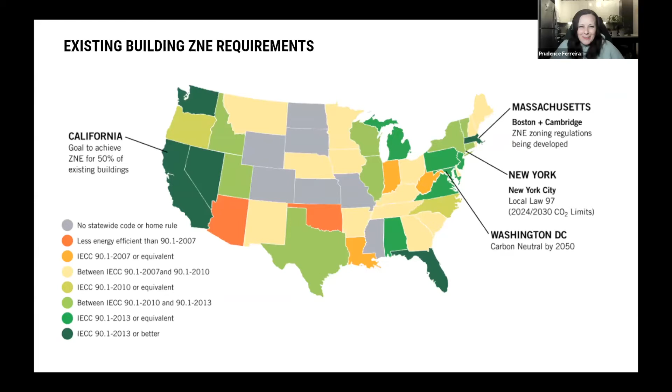And we also all know that every new building that's not net zero ready, at least, is soon going to be a huge liability for our owners and society as a whole. And we just don't have the time or resources to retrofit buildings we design today in 20 or 30 years. And then also the retrofit standards are coming. We have leaders there. And we've heard from our friends at NYSERDA that we need 9,406 retrofits per day or 783 retrofits per hour to meet those 2050 zero emissions goals in the US alone.

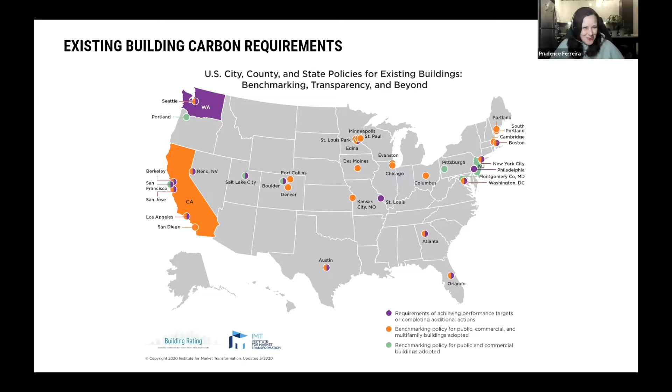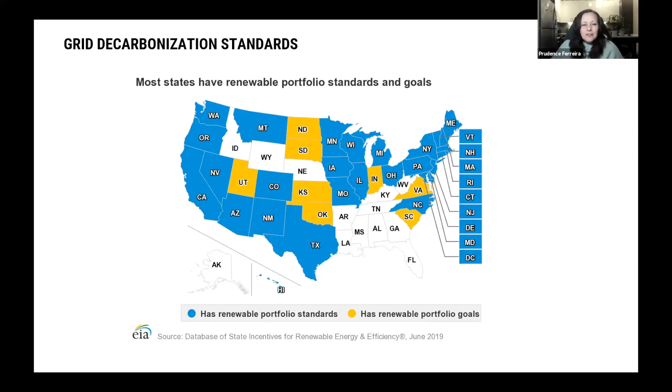And carbon limits are being put in place for existing buildings across the US, not just in New York, although they are leading the way. Massachusetts is close behind, California is leading the way, Washington. And there's also policy around cleaning up the electric grid. As of September 2019, Maine, New York, California, Hawaii, Nevada, New Mexico, Washington, and DC have requirements for 100% clean electricity by 2050. But we need all three legs of the stool to ground and support us in achieving climate action and ultimately climate justice.

And while there are many jurisdictions at all levels leading the way, there are more that don't yet have a plan. And we need all of our communities to have access to a reference standard that gets the balance right and clearly lays out the most effective path to reduce operational carbon emissions for the life cycle of a building. And that starts with envelope efficiency first.

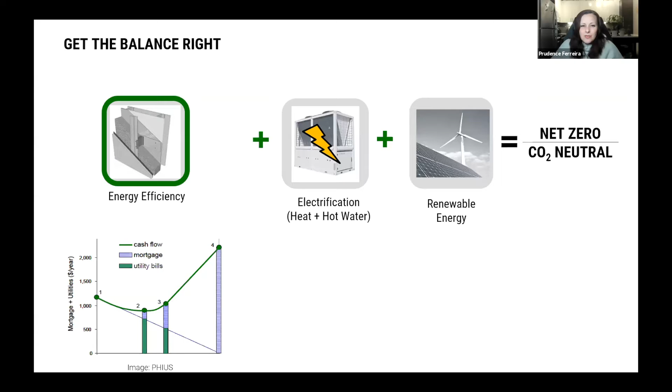So optimizing investment in envelope to the point of diminishing returns with backstops for comfort, resilience, and durability leads to the greatest emission reductions at the lowest construction cost premium due to reduced mechanical and renewable resource costs. We know this. This is basic passive house tunneling through cost barrier stuff with the highest life cycle savings.

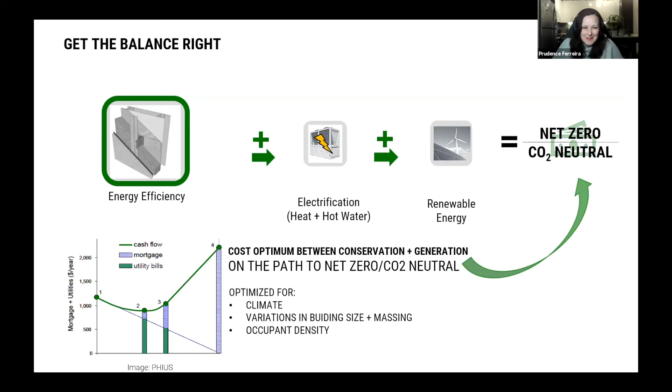And the logic of this approach is so sound that it actually forms the core of the new ASHRAE 227 standard, which ultimately is a standard focused on zero emissions goals with all the best of passive house baked inside. That includes the collaborative expertise of the brightest minds at PHIUS, PHI, and ASHRAE.

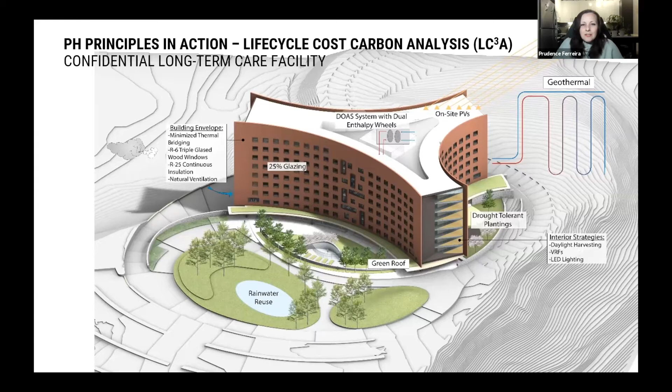So here's a long-term care facility where we can actually see that principle at work in a new trend I'm starting. Others have probably been starting it concurrently, of incorporating carbon into our life cycle analysis now on every project, period. So the passive house path to net zero results in 33% greater emissions reductions than the most efficient non-passive house path, and at a net present savings of more than 2 million just for 20 years. This is only 20 years, not even 40.

Effectively meeting 2040 emissions goals today with less renewable resources needed, no emissions fees within that 20-year time frame. And of course, we need to get to zero with no emissions fees for the life cycle of the building. But look at the passive house option down there. It's already all the way down at 4 kilograms CO2 equivalent per square foot without renewables, right?

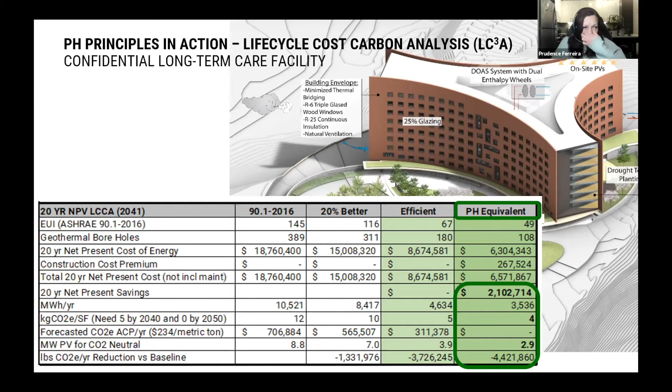Without renewables. And you can see in Massachusetts, at least in Boston, that cost for alternative compliance payments, it's not quite as high as in New York City, but it's at $234 per. So that adds up in the other non-passive house options.

So really the purpose is to take the best of what we know how to do, which is passive house, and take the best of what ASHRAE is developing, because they keep pushing the standards forward, and bake that into a two-model approach. We've got a baseline model, but the baseline model is passive house.

It's got all the Passive House best practices baked into it. And then you have a proposed model that you can use that must be at least as good as your baseline, but allows for some trade-offs. And so right now, the first draft of the standard is in process, and at our next committee meeting, all of our working groups are going to share their draft language with the main committee.

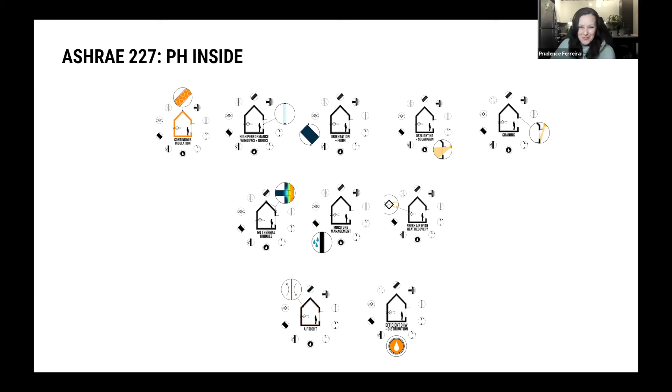And there's been a lot of collegial cross-pollination with folks on various ASHRAE committees so that we can all align. And even ASHRAE itself is turning towards carbon metrics. Even 90.1 is turning towards carbon metrics. So ASHRAE 227 is going to align with ASHRAE 228 for definitions of zero energy, zero carbon, how on-site, off-site, and renewable energy certificates are treated. It also will align with the newest versions of ASHRAE 62 for ventilation, 55 for comfort, 160 for moisture, as well as current Passive House ISO and EN reference standards.

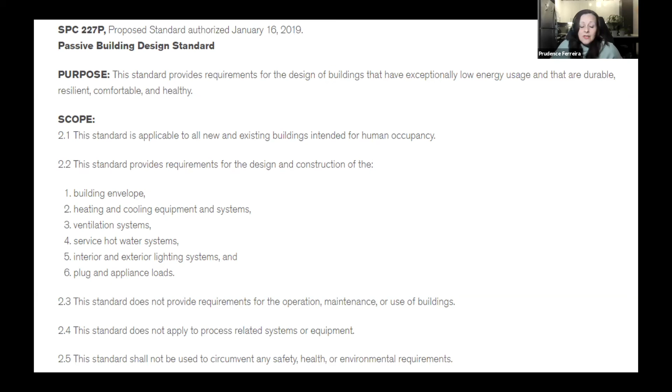And the great thing about it is that it's allowing flexibility or agnosticism in terms of using either future-looking source energy per NREL data, PHI's PER approach, EIA's source energy, or any other hourly emissions data, national, regional, or local, that a jurisdiction cares to apply to it. So it's flexible. It also expands access and reduces barriers to adoption by allowing all new and existing construction to adopt the rigorous building science that is Passive House without forcing authorities having jurisdiction to go through our existing certification bodies alone.

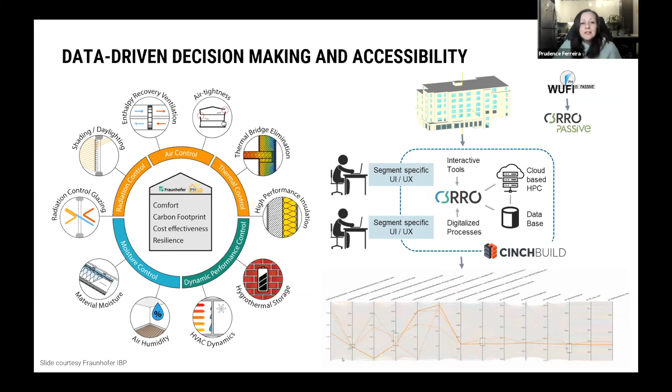Also, it's expanding access by opening up compliance modeling to any ASHRAE 140 validated software tool, as long as you use the same software for the target setting model and your proposed model. So that means free open source software tools like EnergyPlus and the whole Grasshopper Ladybug tools environment, as well as eQuest, IES, PHPP, WUFI Passive, all of it. It's all going to be able to come into play. And with new advanced web-based tools and graphical user interfaces in development with open APIs, an increasing need for data-driven decision-making, as everyone needs to get to those decisions faster, and they're not Passive House experts like we are, flexibility is really important, and the use of big data is really important.

So ultimately, by using ASHRAE 227, which is consensus-based, extremely flexible and software agnostic, we can also increase access to the best practices in cost-effective carbon neutral design for designers that simply don't have time to reinvent the wheel. And together, developments in progressive standards and open source tools will empower our whole industry and those seeking to join us in increasing the velocity and effectiveness of our climate action.

Now, in terms of equity and accessibility, ASHRAE 227 is using a consensus process to crystallize and simplify Passive House technical expertise, but any reference standards need to be consensus-based. Now, while the committee itself is largely Caucasian people that most we would consider to be privileged, the standard is open to public comment, and a first draft is due out this fall. And we are first relying on all of you to read and comment.